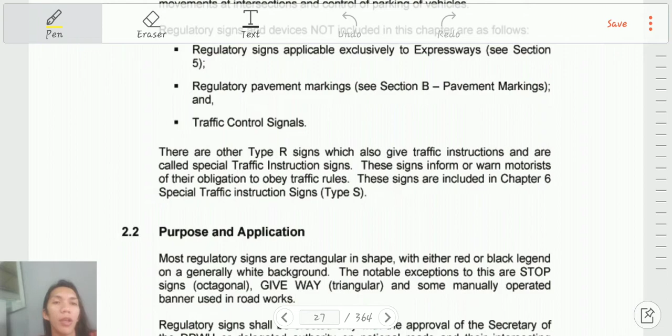Regulatory signs applicable exclusively to expressways, see section 5. So regulatory pavement markings, traffic controls, signals - these are other types of R signs which also give traffic instruction and are called special traffic instruction signs. These signs inform or warn motorists of the obligation to obey the traffic rules. These signs are included in chapter 6.

So purpose and application of the regulatory signs. Most regulatory signs are rectangular in shape, with either red or black legend on a generally white background. Why is it red or black legend on a generally white background? White background so it's easier to read, and red or black so it's easier to attract drivers' attention. That's the reason for the color.

So, give way signs are triangular. If you notice earlier in the signs, the give way sign is shaped like a triangle. That's really supposed to be the shape for the give way sign in regulatory signs. The stop sign, if you notice, is octagonal.

In some manually operated banners used in roadworks, regulatory signs should be erected only with approval of the Secretary of the DPWH or delegated authority on a national road and their intersecting road, or local government authority having the necessary jurisdiction, and shall be removed promptly if the legal requirements of the signs become inconsistent with prevailing conditions.

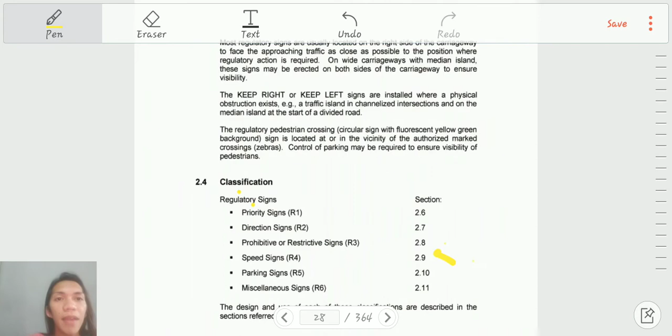So for the location, no fixed traffic rules can be applied to the exact location of regulatory signs as their position varies with the purpose of the signs. For the purpose of design, most regulatory signs are usually located on the right side of the carriageway to face the approaching traffic - yes, so it can face the approaching traffic.

Approaching traffic as close as possible to the position where regulatory action is required. So on a wide carriageway with median island, these signs may be erected on both sides of the carriageway to ensure visibility. Keep right or keep left signs are installed where a physical obstruction exists - that's really where they're installed, at physical obstructions, at a traffic island in channelized intersections, and on the median island at the start of a divided road.

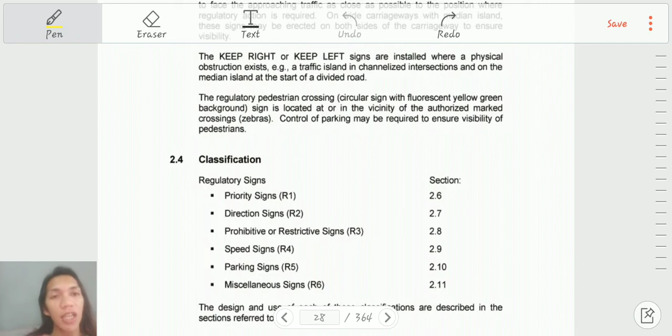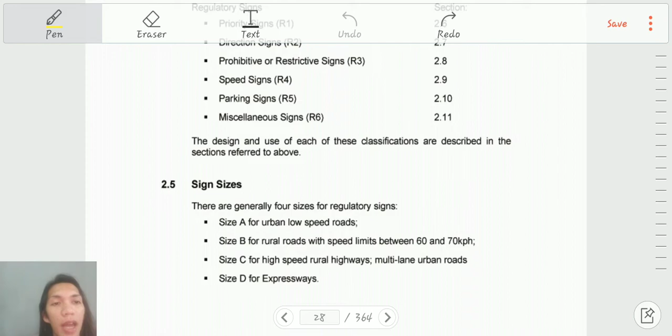Classification of regulatory signs - this is the classification for the regulatory sign, shown on the next page. The design and use of each classification are described in the section referred to above. These are generally: size A for urban, size B for rural roads with speeds of 60 to 70 km per hour, size C for high speed rural highways and multi-lane urban roads, and size D for expressways.

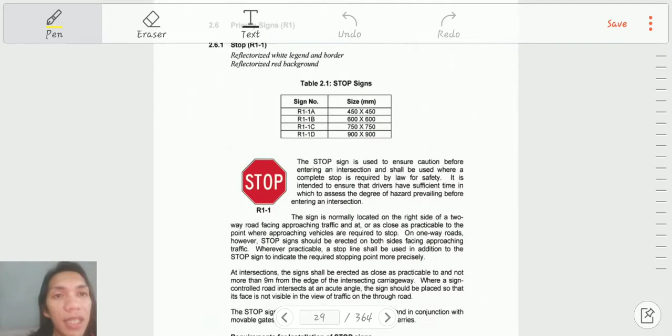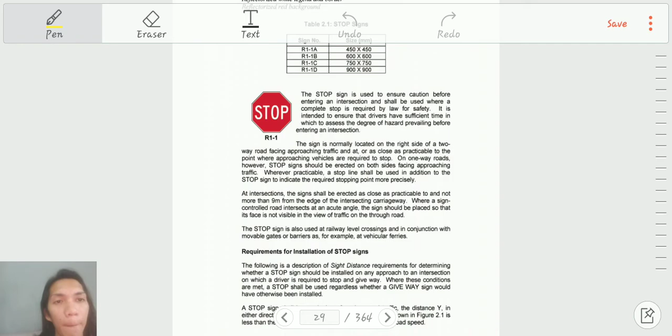This is for the classification of a stop sign. Stop is used to ensure caution before entering an intersection and shall be used where a complete stop is required by law for safety. It is intended to ensure that drivers have sufficient time to assess the degree of hazard prevailing before entering an intersection.

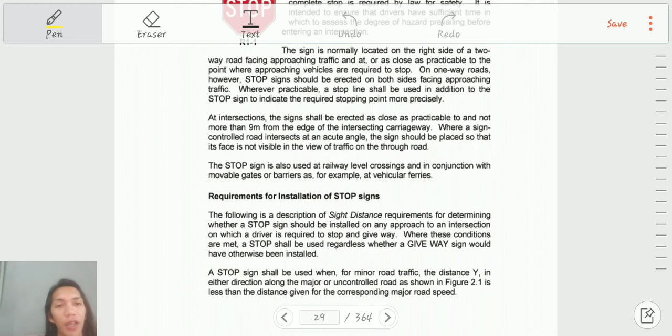Here are the requirements for installation of the stop sign. The following is a description of the sight distance required for determining whether a stop sign should be installed. A stop sign should be used when, for minor road traffic, the distance Y in either direction along the major or uncontrolled road as shown in figure 2.1 is less than the distance given for the corresponding major road speed.

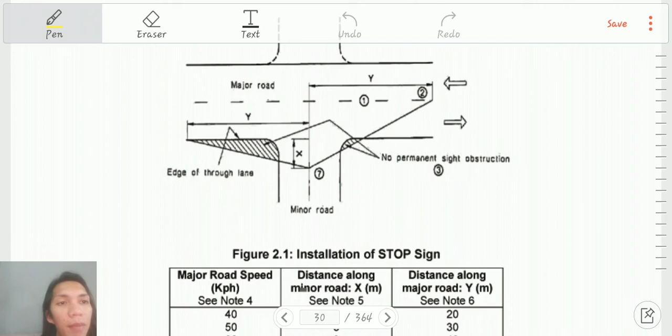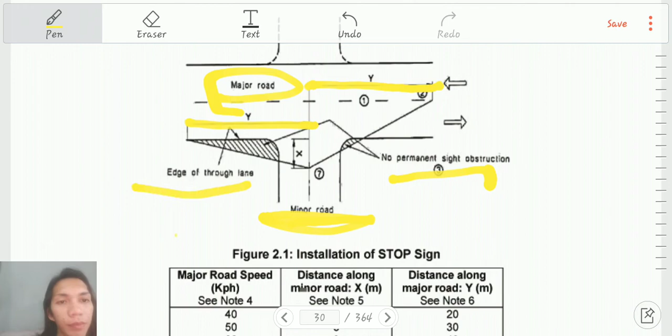Major road, edge of the through lane, no permanent sight obstruction on this side. Here is the Y, the major road. This Y has no permanent signs. Minor road - this is the minor road mentioned earlier. Major road, kilometer per hour, see notes.

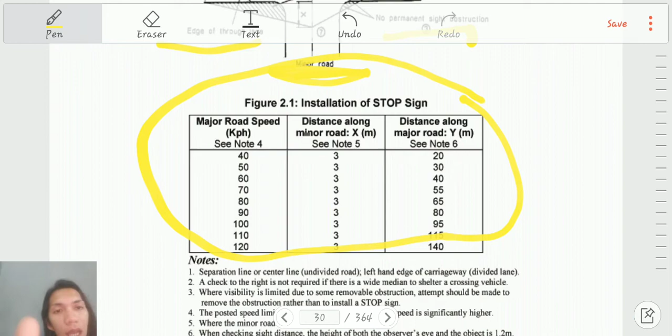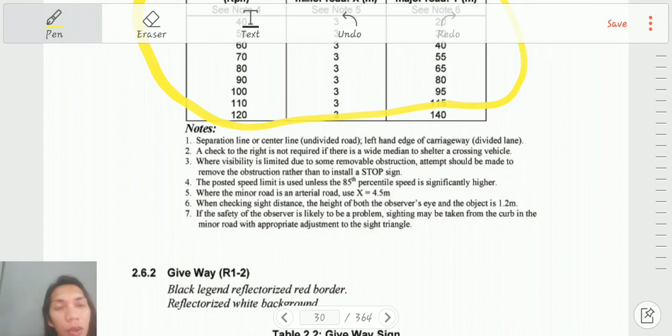This is for the give way sign, used at locations where safe and efficient traffic control requires giving way to the right, or where the rule needs to be modified, or where there is uncertainty as to which traffic should give way.

This is R1, and this is R1-2. R1-2 may be used for control of traffic at locations such as channelized intersections, median openings on divided roads, at roundabouts, and at one end of short sections of one-lane roads, including one-lane bridges and in similar situations. Here's for the give way sign.

Signs should be erected on both sides facing approaching traffic except on unsealed roads. It should be supplemented by transverse holding lines to indicate the safe holding position in the side street.

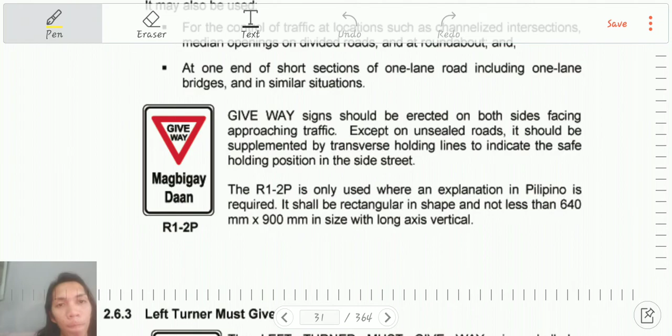It shall be rectangular in shape and not less than 640 mm by 900 mm in size with the long axis vertical.

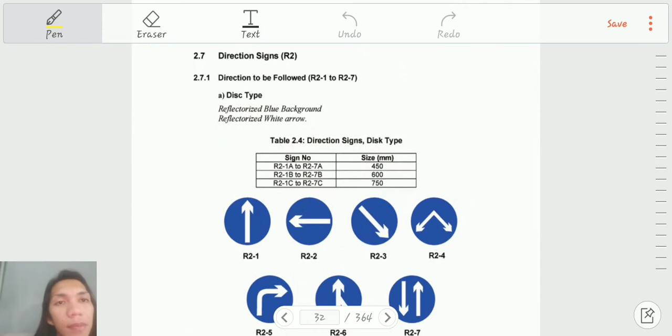So the next is direction signs. Here are the direction signs allowed, this type. The shape of this sign is this type - if you notice, it's circular.

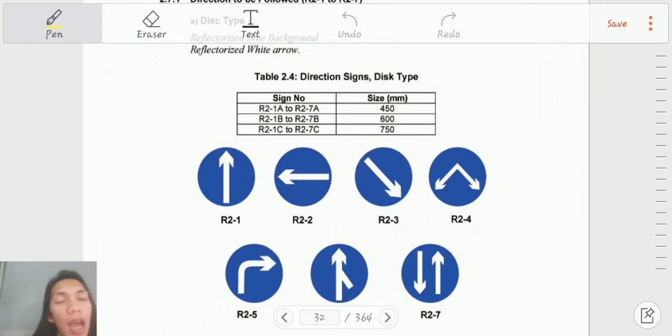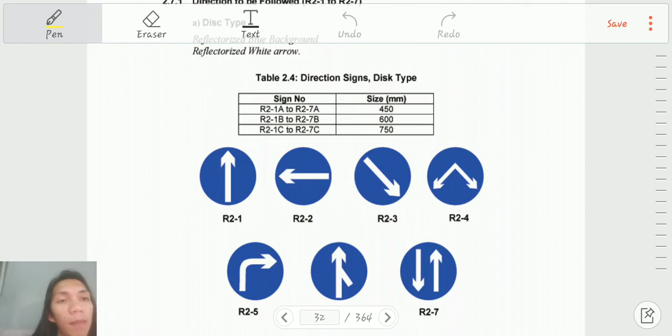So for the table, the direction sign of this type is R2-1A to R2-7A, the size in mm is 450 mm, and so on and so forth.

Arrows - this is two-way. This one, turn to the right, merge traffic, merge, one way. If you remember, that's what was discussed first.

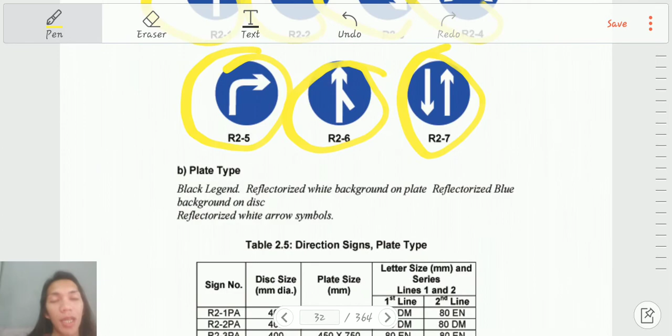Plate type: black legend, reflectorized white background on plate, reflectorized blue. This is the plate type - blue background, with reflectorized white arrows, the arrows are white.

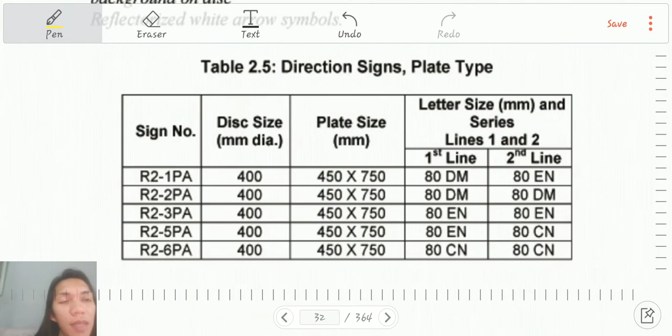Here is the table for direction signs, the plate type. These signs indicate the only direction in which the motorist is obliged to follow.

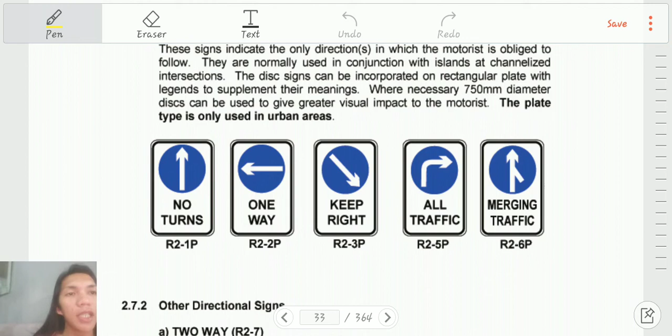This is the no turns sign, sorry. This is one way - keep right, all traffic. This is the merging traffic sign, confirming the merging traffic I mentioned earlier.

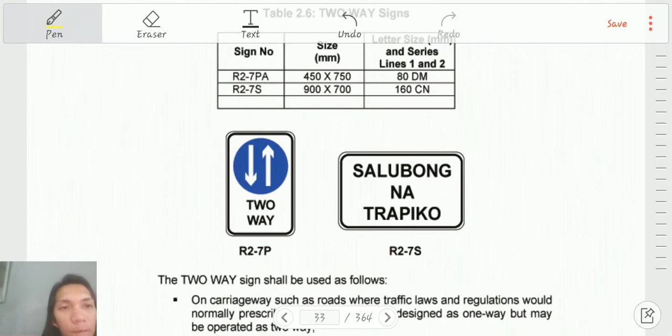One direction signs, two way. Here is for the two way - for two-way traffic. This is the two-way sign that can go this direction and also back this way. So two-way signs shall be used as follows.

Two-way signs should be placed along the road on the departure side of every intersection along the two-way road.

These signs are used alongside a marked lane which is reserved exclusively for vehicles turning left or turning right. At the next intersection, the sign may be used alone or in conjunction with arrows or words marked on the surface lane area.

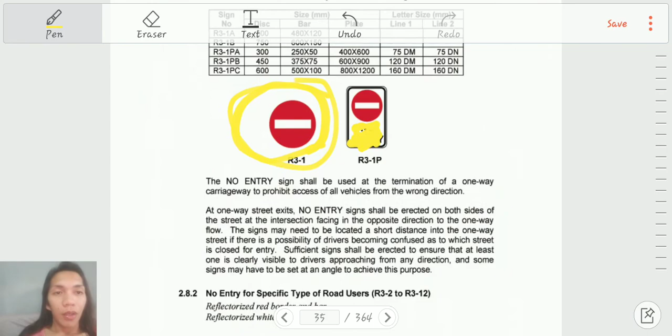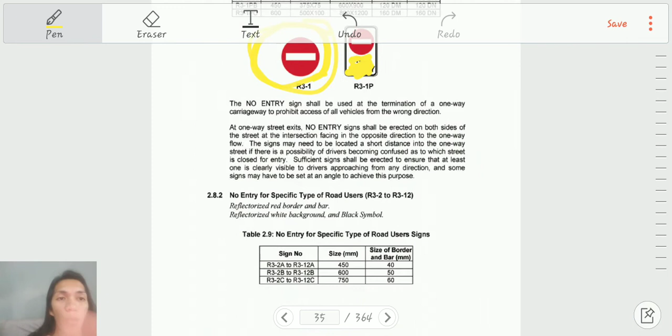This sign shall be used at the termination of a one-way carriageway to prohibit access of all vehicles from the wrong direction, because there are only one-way roads. For example, at the parking area of SM here in Laguna, you pass by the exit of the parking area before the entrance, so there's a no entry sign at the exit, meaning the entrance is possibly on the other side.

There are the tables, reflectorized red border and bar, with a white background and black symbols. Here are the signs, I already discussed these earlier.

Pedestrian prohibition signs, the no pedestrian crossing signs, can be used in conjunction with a supplementary plate in the special instruction sign series such as use overpass. If there are pedestrians below and there's an overpass, it's more preferred to use the overpass since it's safer for pedestrians.

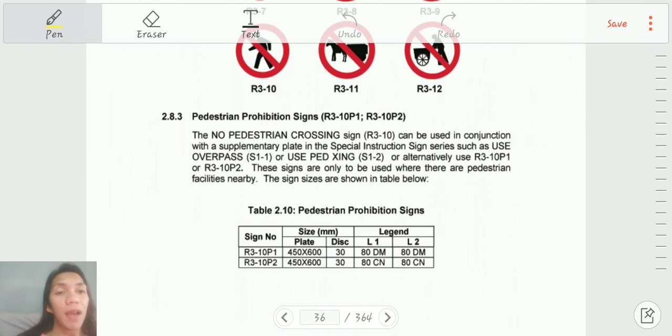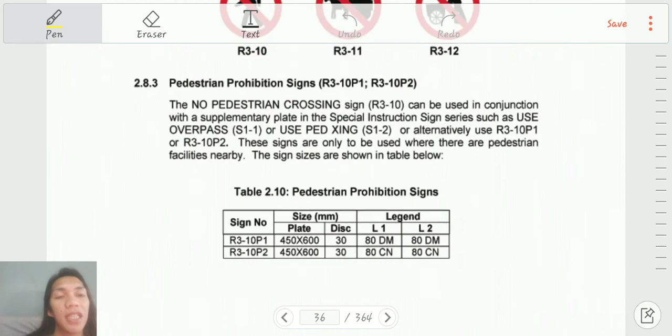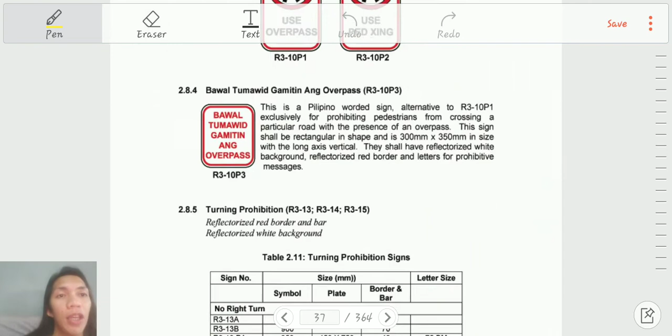When we say pedestrian, like what I said earlier, it is the person passing by. Pedestrian means people, that's why people walking are called pedestrians. So, use overpass, this one. Use ped xing, bawal tumawid gamitin ang overpass. This is a Filipino word.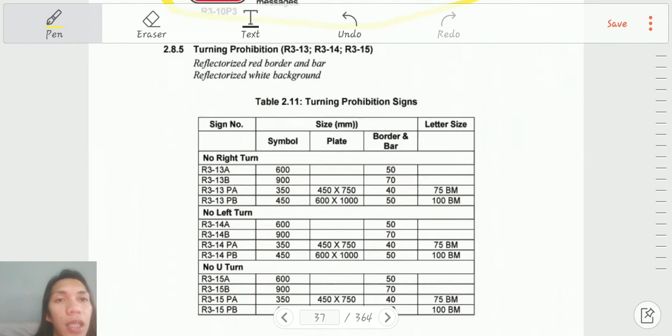As an alternative to R3-10P3, exclusively for prohibiting pedestrians from crossing a particular road. Here is the table. Turning prohibited sign is reflectorized red border and bar with reflectorized white background, this is its table.

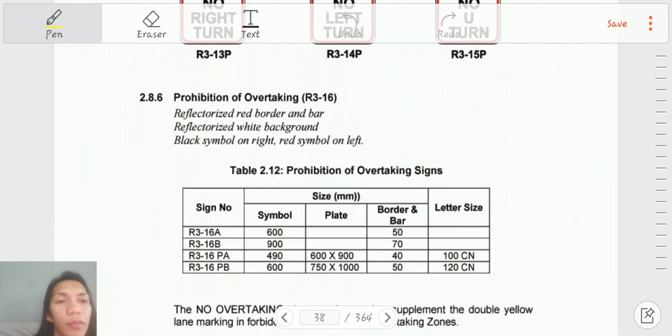No right turn, no left turn signs shall be used at intersections where vehicles are forbidden to make a turn to the right or left, respectively. No U-turn signs should be used where vehicles are prohibited to make a turn, reversing the direction of travel. Separate plates bearing messages such as PUJs or PUBs or trucks, and others can be used to supplement the intended message. Such plates will be white reflectorized background with black legend.

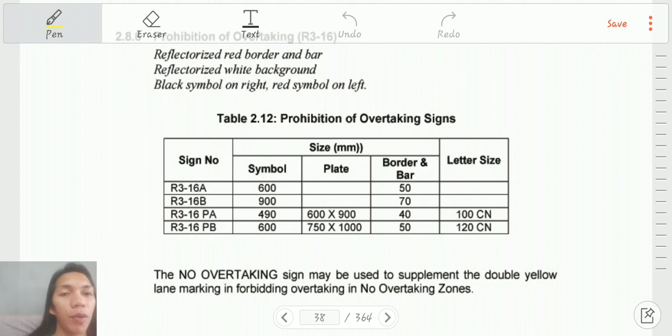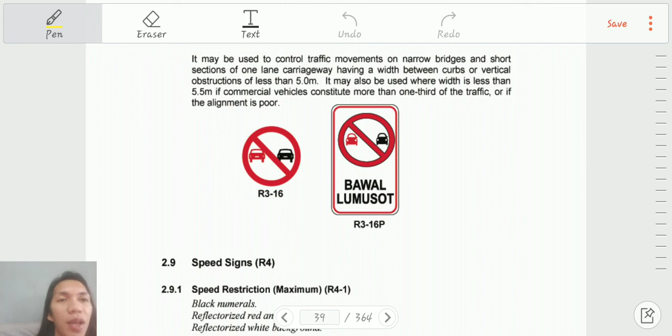This is the table for prohibiting overtaking. The overtaking signs may be used to supplement the double yellow lane marking, prohibiting overtaking in a no-overtaking zone. It may be used for control traffic movements on narrow bridges and short sections of one-lane carriageway having a width between curbs or vertical. So this means bawal lumusot, no overtaking allowed if the sign looks like this, possibly red and black legend with white background.

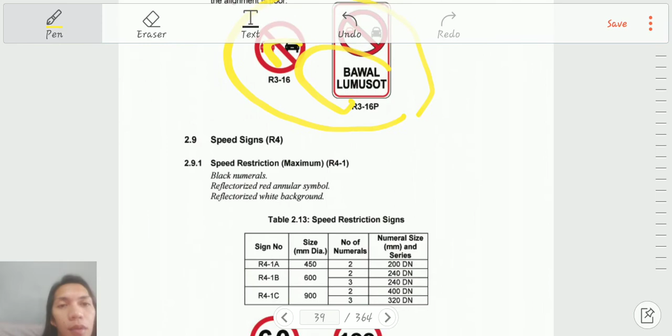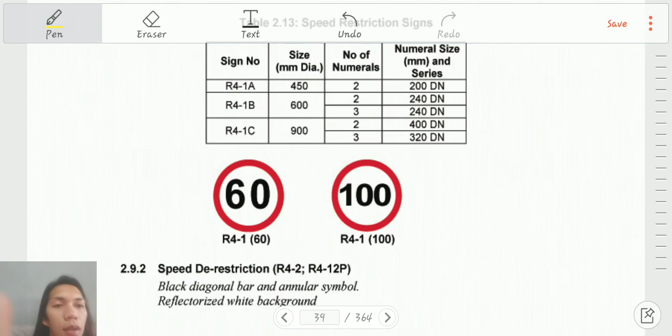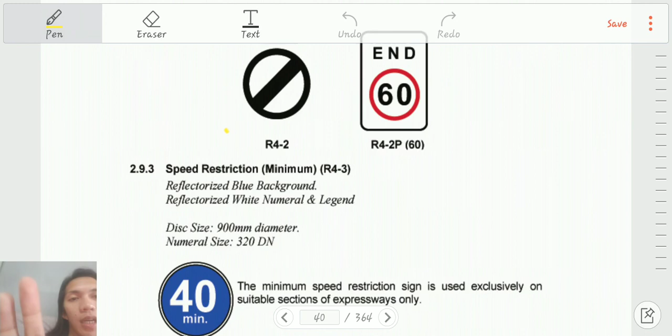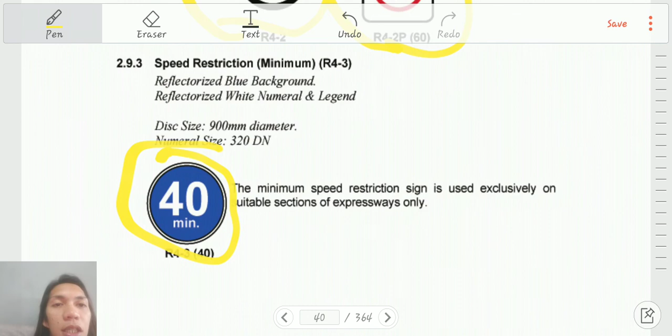Black numerals. Here are the tables. You can pause my video here if you want. This is the table, the end of 60 kilometers, and R42, reflectorized blue background, reflectorized white numeral and legend. This is the top, disc size is 900 mm diameter, numeral size is 320 DN for the numbers.

The minimum speed restriction sign is used exclusively on suitable sections of expressway only.

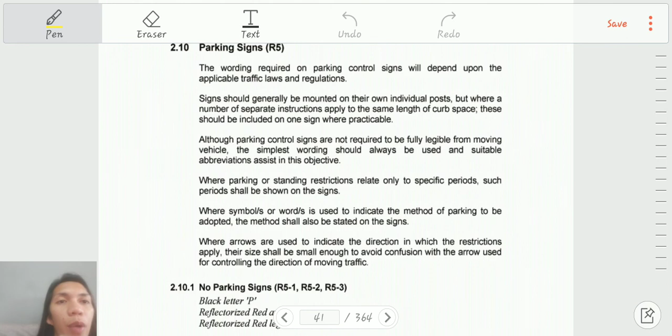Parking sign, no parking sign. This is the table here. The wording required of parking control signs will depend on the applicable traffic laws and regulations. So that's the parking sign. No parking sign is black letter P, reflectorized red annular symbol with bar, reflectorized red legend and red arrow.